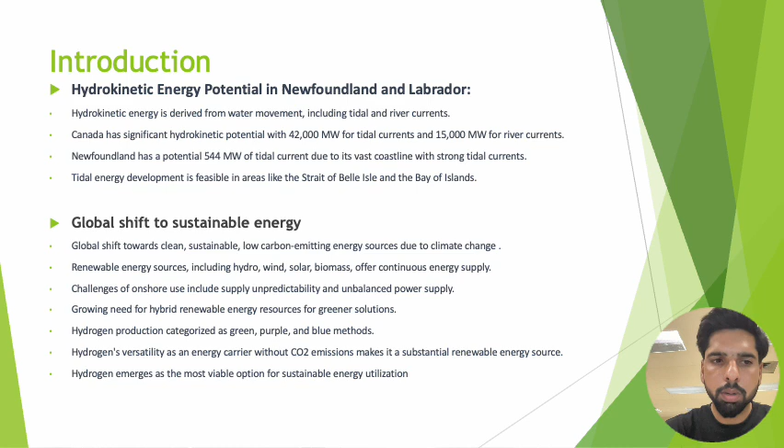Then I would like to discuss the global shift to sustainable energy. This global shift towards sustainable energy sources is a response to the severe threat posed by greenhouse gases and climate change. This shift aims to transition from fossil fuels to clean, low-carbon emitting energy sources such as renewable energy options. The momentum towards sustainability has been gaining significant traction in recent years, highlighting the importance of adopting green energy solutions to combat environmental challenges.

After that, I would like to do the introduction of green hydrogen production using a hybrid offshore renewable energy system. Green hydrogen production using a hybrid offshore renewable system involves utilizing renewable energy sources such as offshore wind and marine energy to power water electrolysis and produce hydrogen. This approach offers efficient and environmentally friendly energy generation, reducing carbon emissions and providing adaptability and cost reduction. And after that,

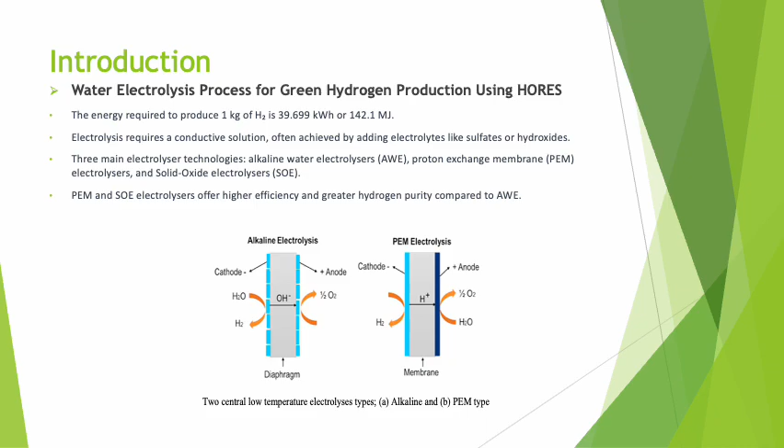now I'd like to compare the electrolysis technologies. There are three electrolysis technologies. One is alkaline water electrolysis, the other is polymer electrolyte membrane electrolysis, and the other one is anion exchange membrane electrolysis, which we will be focusing on in this project in the next semester. So the

alkaline water electrolysis: the advantages are they are cost effective and have been widely used for hydrogen production, but the challenges are they are less efficient compared to other technologies and may have lower hydrogen purity. They are commonly used for large scale industrial hydrogen production.

The proton exchange membrane electrolysis: the advantages are they are highly efficient, have rapid response times, and offer higher hydrogen purity, but the challenges are they are relatively more expensive than alkaline water electrolysis, and durability may be a concern in

some applications. The anion exchange membrane electrolysis shows promise in being more efficient than alkaline water electrolysis and having lower material cost than PEM. But the challenges are that these technologies are still under development and commercialization is in progress. But this electrolysis has potential for various hydrogen production applications, particularly in renewable energy integration.

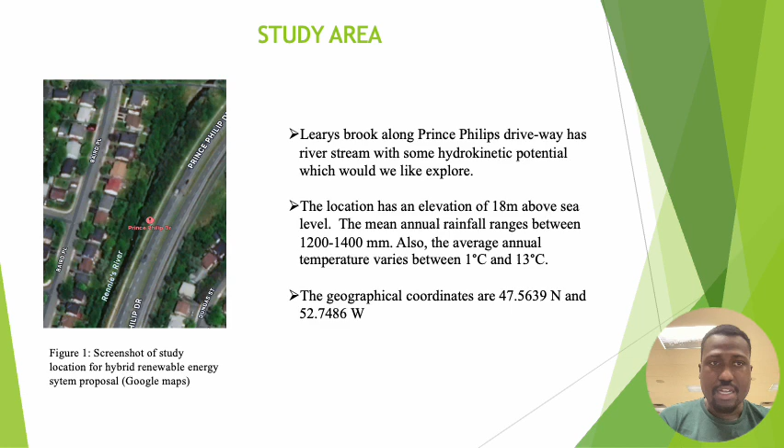Our study location is Learys brook along Prince Philips Drive, which has a river stream close by and obviously has some hydrokinetic potential, which we are going to investigate. The location has an average annual rainfall that ranges between 1,200 to 1,400 millimeters. The geographical coordinates are seen in the slide. So we got our data from HOMER 2, and HOMER gets its data from the NASA database.

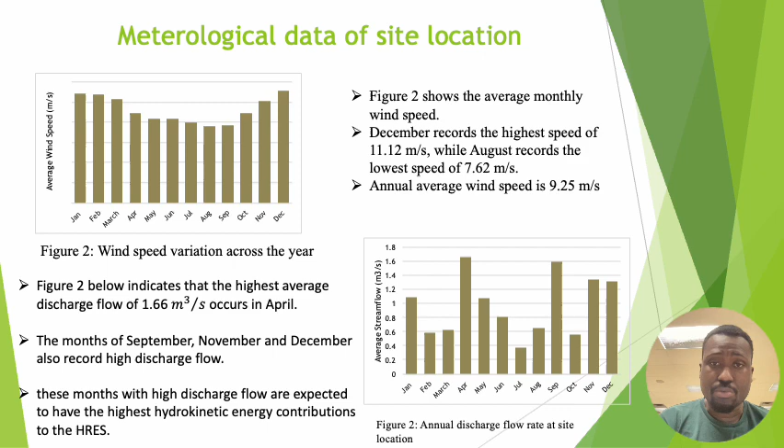From the database, we see that this location records high wind speeds during December with 11.12 meters per second, and the lowest speed occurs in August with 7.62 meters per second, which is relatively high. We also see from the database that the highest flow rate of water happens in April with a value of 1.66 cubic meters per second. The months of September, November, and December also record a high discharge flow rate as well. What this means is that during these months, we are expected to have the highest hydrokinetic energy contribution to our hybrid renewable energy system.

Going forward, we are going to look at our energy component design. Basically, our hybrid renewable energy system design consists of our hydrokinetic turbine, our wind turbine, our electrolyzer, our reformer, hydrogen tank, converter, and battery. We also believe that we are going to generate energy which is also going to support the load, the grid, and this constitutes our electrical load. The reformer here is going to serve as a kind of buffer or as a backup to support the hydrogen load when there is inadequate renewable energy power supply.

We are going to consider three case scenarios. A case A scenario, which consists of only the hydrokinetic turbine and the other components. A case B scenario that consists of a hydrokinetic turbine and wind turbine with the other components, and a case C scenario that comprises of only the wind turbine with our other components.

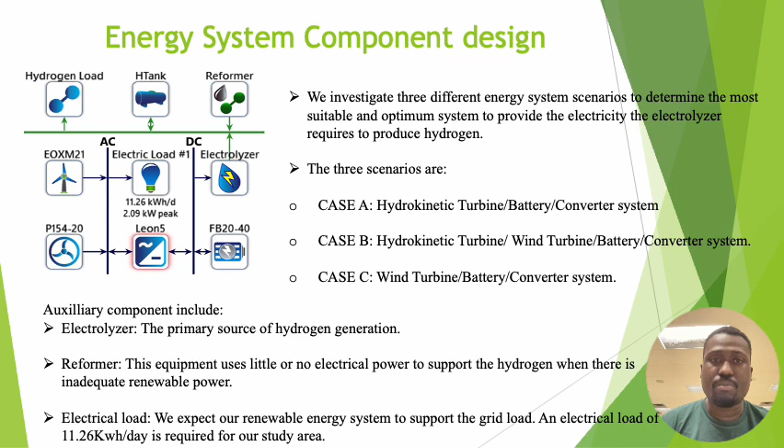Our specifications have been modeled and we have also sized our components and modeled them according to some equations, and this table gives a summary of what we are going to use for our design. Our hydrokinetic turbine having a capacity of 20 kilowatts, our wind turbine having a capacity of 100 kilowatts, our electrolyzer having a capacity of 744 kilowatts.

Worthy to note that these components have some associated costs. The capital cost here for the hydrokinetic turbine is about $20,000 per the 20 kilowatts. The wind turbine is about $1,300 per kilowatt, and our electrolyzer is about $200 per kilowatt.

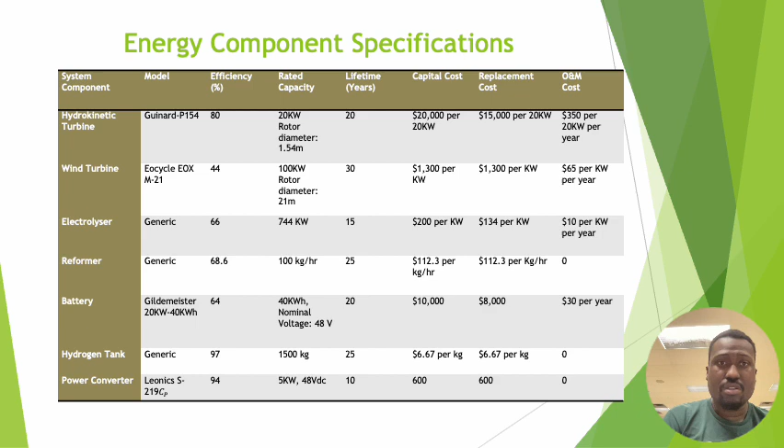Going forward, for us to make the best decision from our HOMER Pro, we need to know some certain terms such as the net present cost, the levelized cost of energy, and the utilization of electrolyzer. The net present cost is basically the worth of all the costs incurred by the system over the system's lifespan minus the worth of the revenues earned during the project lifespan. That is what we refer to as a net present cost.

Our levelized cost of energy is basically the average net present cost of the energy generated over its lifetime, and the utilization of electrolyzer is the ratio of the total hydrogen produced under our given system variables to the maximum possible quantity of hydrogen that can be produced under ideal conditions.

We need to know also that our tool for simulating our system design made up of certain specifications is the HOMER tool, and the HOMER tool basically optimizes the system and gives us the best energy system in terms of sizing and cost.

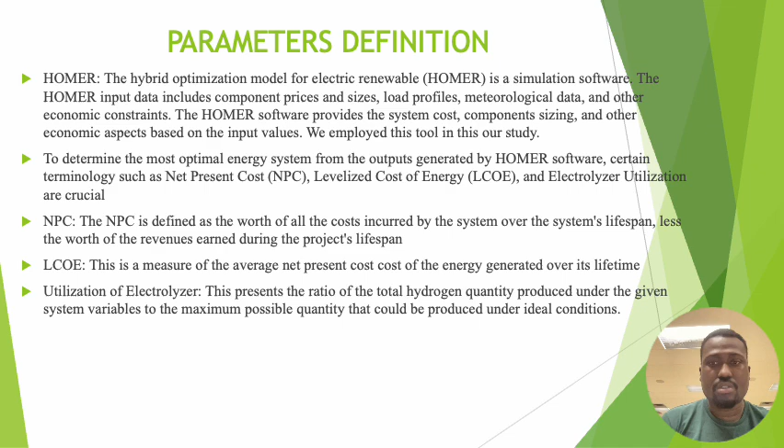From the results, we see that out of these three cases and scenarios we came up with, our case B scenario, which consists of both the hydrokinetic and wind turbine, happens to be the best and optimal case scenario. It is going to comprise of a 200 kilowatt wind turbine with 520 kilowatt hydrokinetic turbine and one string of battery.

Going forward to further cement that case B is the best choice, we see that case B recorded the highest electrolyzer utilization of 81%, producing about 374 kilograms of hydrogen. Case A comes next with 50% electrolyzer utilization with 234 kilograms of hydrogen.

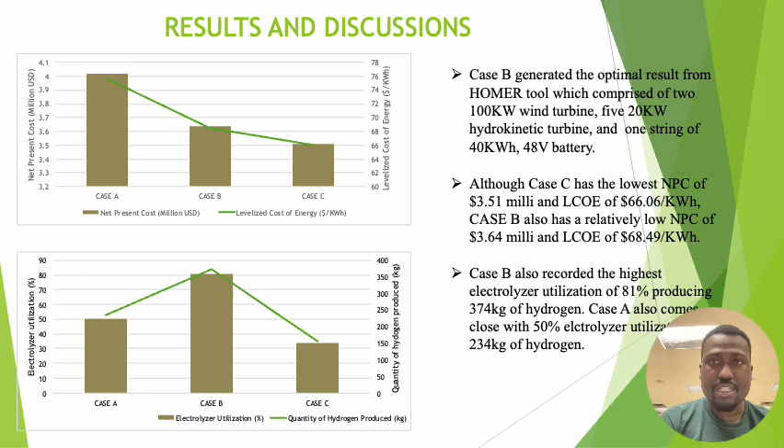With this, I end my own section and I hand over to David to give us his insights and analysis on the electrolyzer itself. Thank you.

So, as mentioned by my partner, we'll be comparing the alkaline water electrolysis method to the proton exchange membrane method under similar conditions. The reason we are comparing them under similar conditions is so we can get as fair a comparison as possible between both methods. The chosen state conditions are 70 degrees Celsius and 30 bars of pressure. We chose these particular conditions because we learned that under 70 degrees Celsius and 30 bar, both techniques can function and produce hydrogen gas.

The reactant conversion, that is the amount of water that will be converted to evolved gases within the electrolyzer, was taken at 65% for both methods. It's important to note that the alkaline water electrolysis method would require a mixture of some form of alkaline with the pure feed water in order to generate the process feed. Now, this is not the case for the proton exchange membrane method, as an alkaline medium is not needed at all in that case.

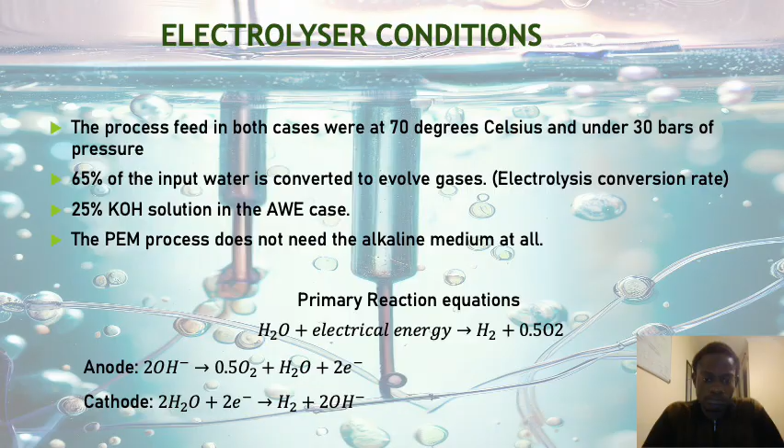Now, both techniques had seawater coming in at a mass flow rate of 1,658 kilograms per hour under atmospheric conditions. Both techniques also had to undergo a desalination process where salts or dissolved salts were separated from the pure, purified water stream.

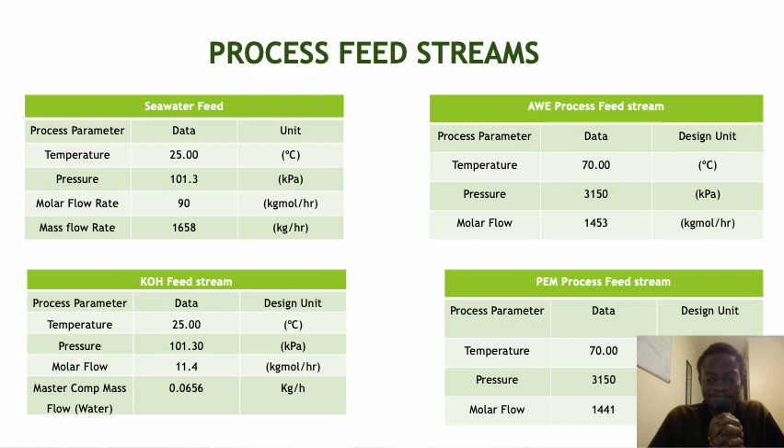For the alkaline water electrolysis method, this purified water was then combined with alkaline coming in, as well as recycled unconverted water from further down the process, which came back to be reused as process feed. For the PEM, it didn't have to undergo this alkaline method, but it was also mixed with recycled unconverted water, which came from down the stream. The flow process diagram will explain this point more clearly.

Now here we have the process flow diagram for the alkaline water electrolysis method, which was designed using Aspen HYSYS. The process starts here with seawater being fed in at a mass flow rate of approximately 1,658 kilograms per hour. The impure seawater is then sent to a desalination unit first in order to purify it, and salts are removed using the reverse osmosis method.

The purified water then goes on to be mixed with two further streams. Firstly, we have the alkaline stream, which consists of 25% potassium hydroxide solution, and the second stream is a recycled stream which consists of unconverted water from the electrolyzer, which I will get to shortly. After the mixer, the combined stream is then pumped and heated to the earlier stated conditions of 70 degrees Celsius and 30 bar. This is known as the process feed.

This process feed goes into the electrolyzer to be separated into the gases we are looking for. This electrolyzer, as stated earlier, undergoes a 65% reactant conversion rate, which simply means that 65% of the water passing through it is converted into the processed gases, which are the products we need. The processed gases are vaporized, while the unconverted water flows through the bottom in the liquid phase.

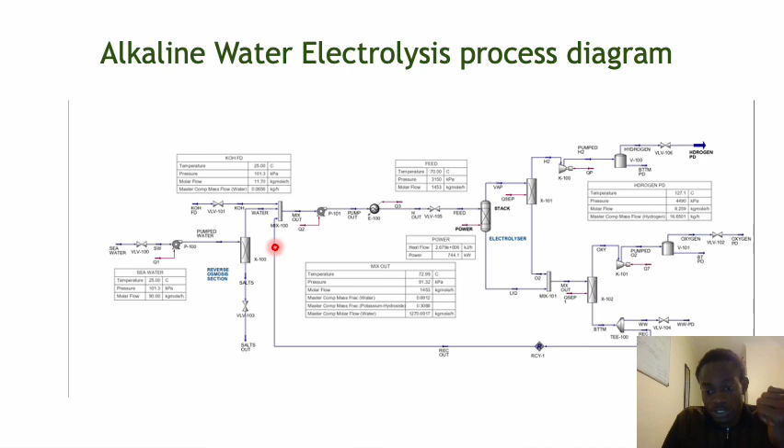Now here we have the process diagram for the proton exchange membrane technique. The process is basically the same for both systems. However, the main difference here is that, if you look here, there is no alkaline stream. This affects the entire process going downstream, and these results will be discussed later. But it is important to keep in mind that the process is basically the same through this flow diagram.

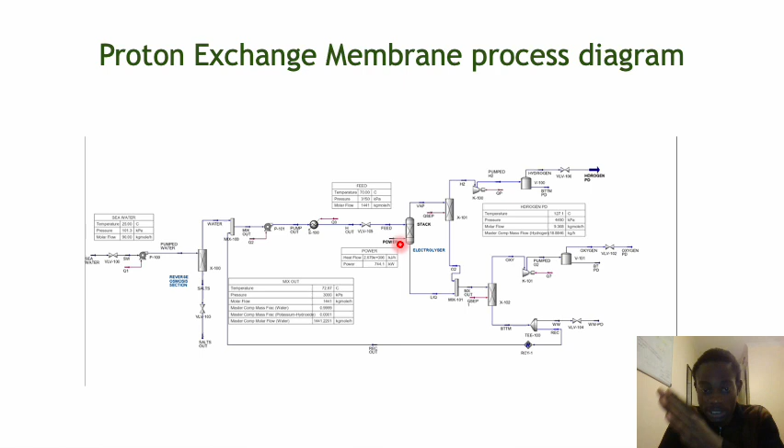Now we have come to the results of our Aspen simulation, and here we deemed that the proton exchange membrane technique outperformed the alkaline water electrolysis technique. It produced more hydrogen under the same conditions, it consumed less energy, and it produced marginally less greenhouse gases as well under similar conditions.

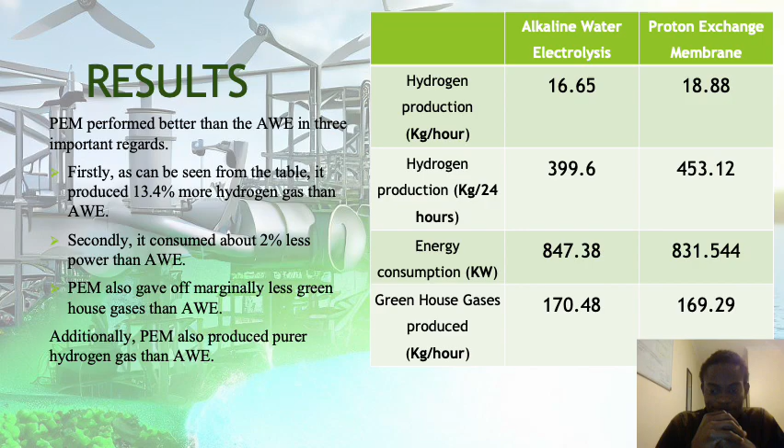And finally, our interest in this research is to develop a cost-effective means of generating hydrogen using modular means, if possible, and we want to use hydrokinetic means to achieve this goal. Unfortunately, we cannot deploy PEM, that's proton exchange membrane technology, here because of several disadvantages it has. One of them is that it is energy intensive, and it still requires the reverse osmosis method to purify the saltwater feed which we have chosen. Secondly, PEM is inherently expensive.

That is why we have chosen to develop the anion exchange membrane technology and incorporate it into our work. Our future work is geared towards that direction. We're going to conduct something similar using the anion exchange membrane, which is still in its infancy. So we may need to go into the laboratory or conduct further research in order to get some important data, such as the conversion rate of AEM, that's anion exchange membrane reactors.